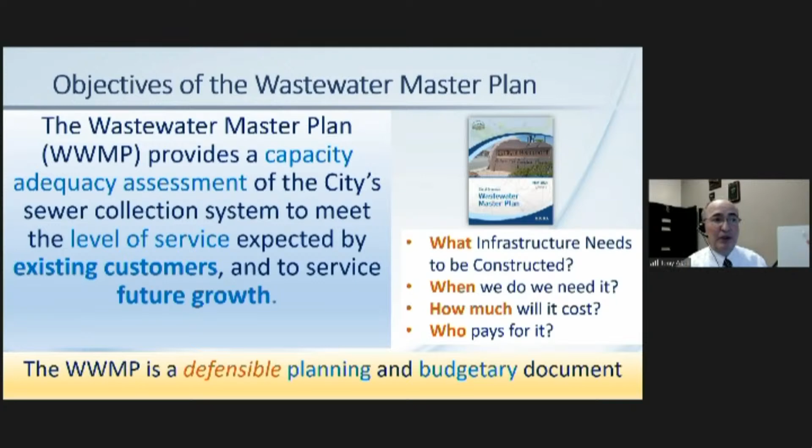So these are the what is it and how do we use it. It does document the improvements that will be needed, line item by line item, how much they cost, and of course who will eventually be paying for them.

It goes down to the street, and in the street we have bigger pipelines that take it down and convey it all the way to the treatment plant. So this is the snapshot that most residents think about. They know they're flushing the water, and it goes someplace. Out of sight, out of mind, someone is taking care of it.

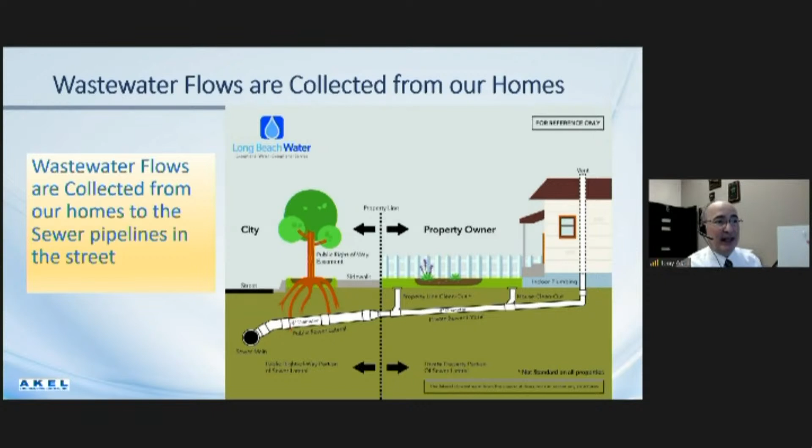Then let's take a look, once it gets in the street, what happens? In the street, we're collecting all that water and it's going to pipelines. This is the ideal condition, we like them to flow downwards, meaning by gravity. That's the best case scenario. So we build pipelines that slope downwards, and if we can do that all the way, we're not using any energy, we're saving. That's why you're going to keep hearing the word gravity sewer, taking that flow and collecting it to the plant. But that's an ideal world.

With challenging topography, we can't have downwards all the time towards the plant. When we have to go uphill, we have to use a device called a pump station. So we collect that water at the pump station, and with energy, we force that pressure. With pressure, we force that water uphill. That's why you hear the word force, we're forcing that water into a main, the main that is up on this side, and that's where you hear force main.

So we talked about three components. There's gravity that collects it downwards. There's a pump station, we have lots of them in Beaumont that collect it. A pump station better be able to pump all that water that comes in, no matter what time of day, pumps it into a pipeline and forces it into that pipeline. It's a main, force main, gravity sewer, force main, pump station. You're going to hear that throughout.

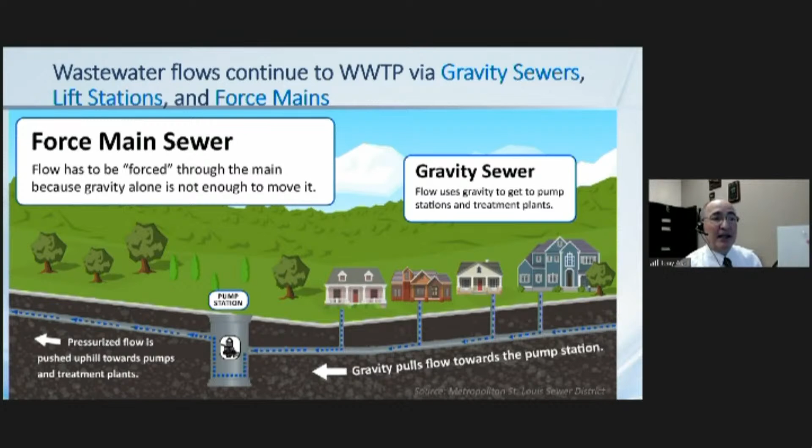Now that we have the elements going to the treatment plant, let's look at our specific system. The map shows the city of Beaumont with color-coded lines. Blue lines are the larger 10-inch pipelines collecting wastewater all the way to the treatment plant, and red arrows show how wastewater is collected from neighborhoods toward a central point, a lift station.

Remember, we talked about the lift or pump station, sending water through force mains uphill, sometimes up and down the topography, to a point where it can go downhill again. But ultimately, we want to send all that water to the treatment plant.

As an example, let's look all the way in the northwest, Fairway Canyon. This blue area goes downhill to what's called Fairway Canyon. It was downhill, but unfortunately that's all we can do here, so we have to pump it with a pump station through a force main. You can see the arrow showing us going this way through a force main, a long way, all the way to Lower Oak Valley.

Lower Oak Valley collects in its own area. The purple area collects that plus the blue area and sends it to the next pump station, which collects the green area, called Upper Oak Valley. All that flow—Upper Oak Valley, Lower Oak Valley, Fairway Canyon—is collected and sent through another force main to the most important pump station you'll hear about today, the Beaumont Mesa pump station. This pump station essentially collects most of the flow west of Highway 10.

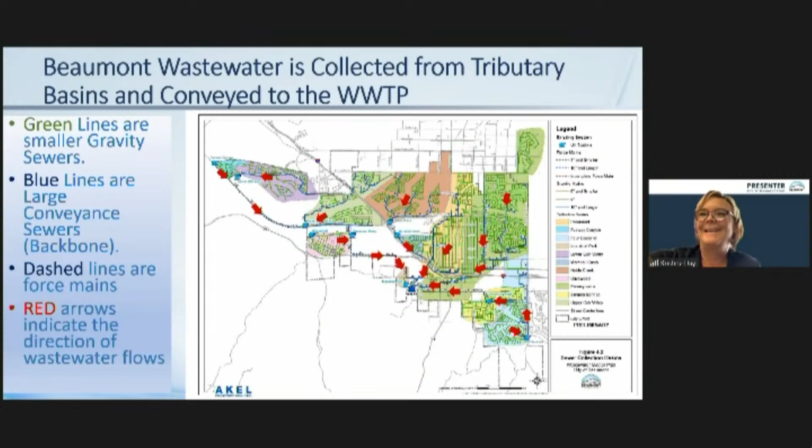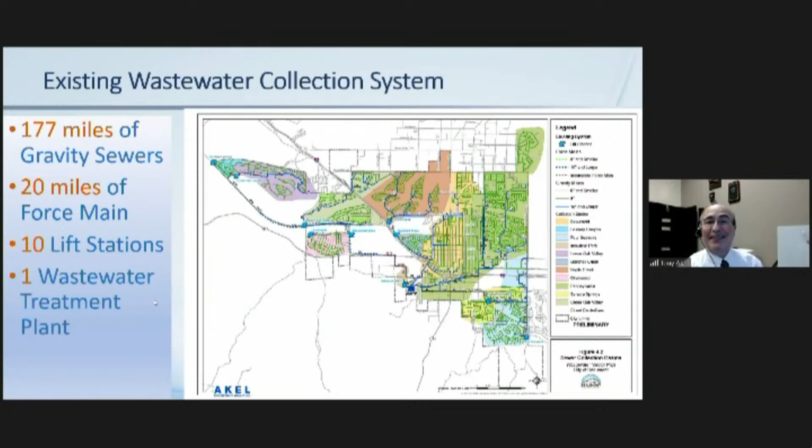All right, very good. So we've talked about the system, some statistics about it. Interesting facts: 177 miles of gravity sewers, the ones that go downhill. We have 20 miles of pipes that are pumped up the hill or up and down the hill, and we have 10 of those lift stations, shown in the blue symbol. And we have one wastewater treatment plant. These are some interesting facts about our system.

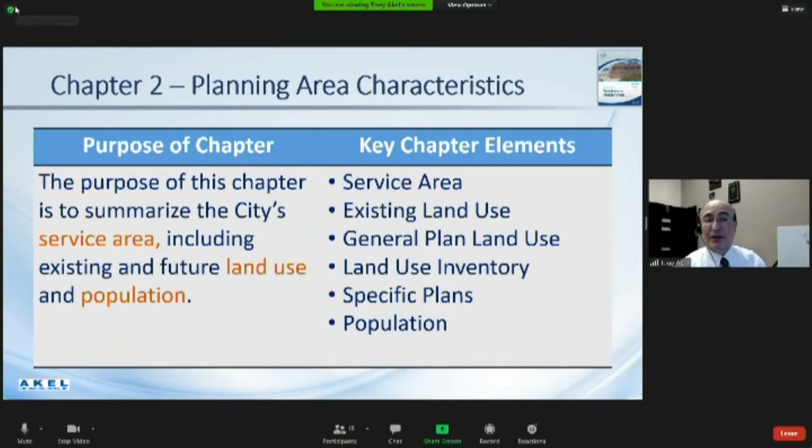Next, chapter 2 characterizes the planning area. Number one, what is the service area that we're servicing? What land uses are we expecting to develop? One of the primary objectives of a wastewater master plan or infrastructure master plan is to support a general plan. The general plan, smart planning people are developing areas and opportunity areas for development. So when a developer comes in, we can tell them what is available, but the infrastructure has to support it. When they are ready, are we ready? Is the system ready to accept them?

That's what this project had to look at: can we accept them, when can we accept them, or if we can't accept their flow at this time, what needs to be constructed so they can develop properly in their timeline? We also looked at some population, and population we look at in generics. The most important part is linking the land to the water, the wastewater to the land.

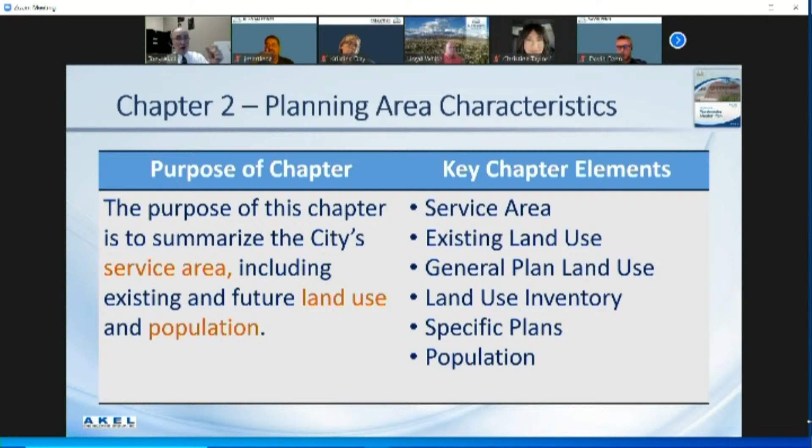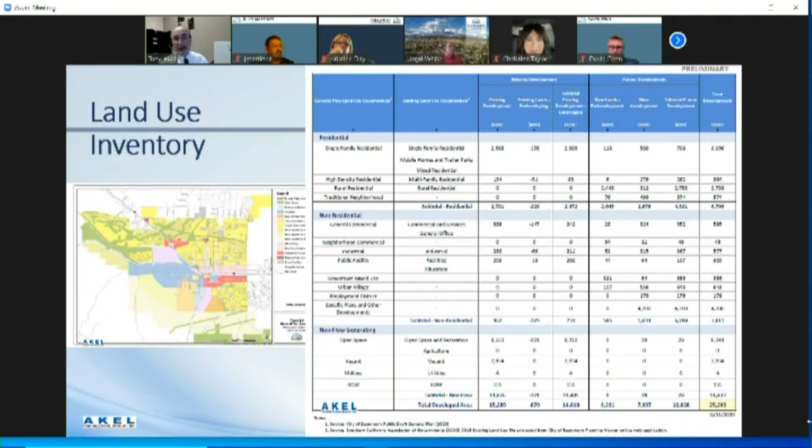Furthermore, we were not working just in generalities and future lands. There are specific lands slated for development that are on the books. So we used those—this is the best case scenario—to inventory what we're expecting in terms of flows from each of those developments. Those are the exact flows that we used.

We documented those flows and used them in the master plan to determine what improvements are needed, what kind of pipelines or pump stations need to be upgraded to accommodate all these improvements. That's quite a bit of improvements slated here. So we identified the improvements needed ultimately, but also short or intermediate term—the 10-year plan is the plan that counts the most.

This is where we know things might happen, we expect things to happen, because things in the future change. We don't know what timeline that's going to be. But 10 years is the standard plan that you look for, plan for, and budget for.

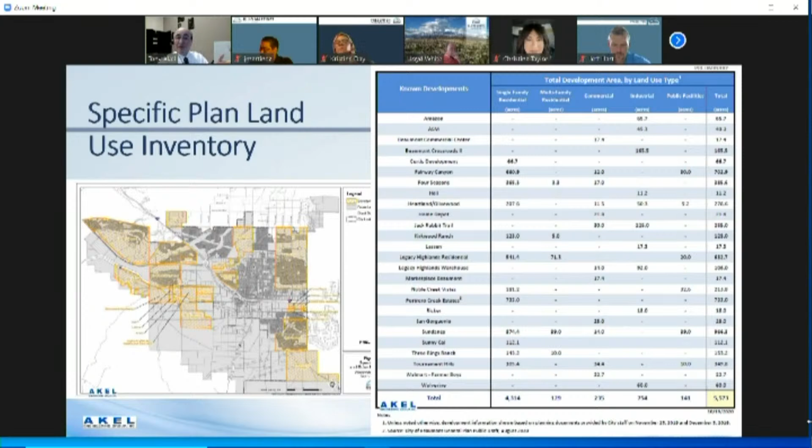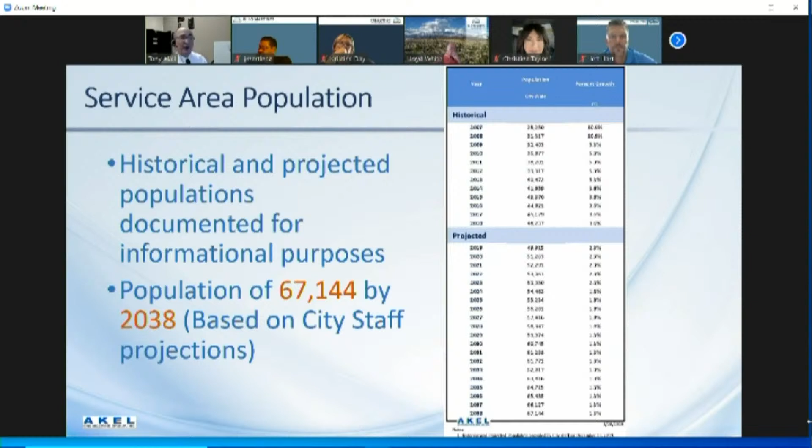We looked at population based on the general plan. We have a population we're expecting of 67,000 people by 2038. So we looked at that and planned for that, although we are also looking at the 10-year plan. So we look at two horizons, essentially.

Then chapter 3 focuses on evaluating an existing system. We have a lot of pipelines and we're judging if that pipeline is good enough. So how do we judge if the pipeline is good enough?

One way to judge it is through what's called a criteria. Those are the elements that tell us how to judge a pipeline—is it good or not good enough? What makes it good? It needs to be this much. So this chapter identifies what the judging criteria is.

This is what makes it also even more defensible. There's a lot of elements that make it defensible, and this is one of them. What criteria—are you very conservative in your judging, or are you liberal in your judging?

Well, in our case, we were consistent with Eastern Municipal Water District, our neighbors to the south and west. They are a big district and have been using this criteria. We have adopted their criteria, and so this master plan follows the Eastern Municipal Water District judging criteria.

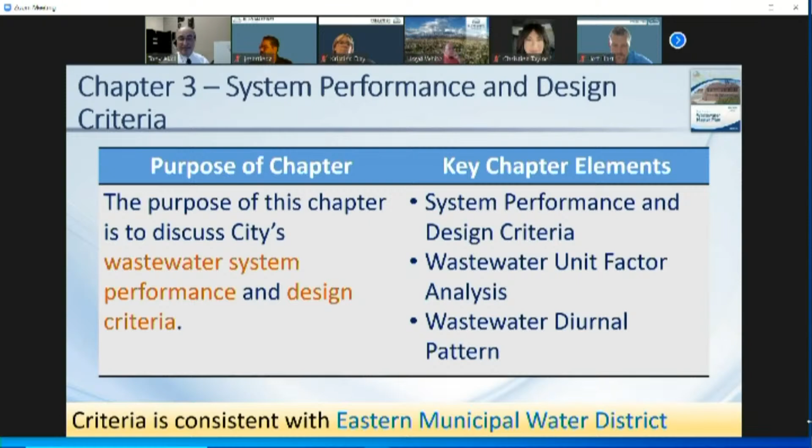The next slide again lists the criteria on the right-hand side, in case you are curious what kind of criteria. For an 8-inch line, we want to make sure it's sloping downward at a certain angle. We want it to go at certain angles so it doesn't get plugged. We don't want that flat—we want it steep enough so it self-cleans itself.

For the 10-inch, we allow it to be a little flatter, 12-inch flatter, but if it's a smaller pipeline we want it steeper so it cleans itself and doesn't cause maintenance problems. This is just an example—I'm not going to go over all of these, just giving an example of a criteria for judging pipeline adequacy, and again, it's consistent with Eastern Municipal Water District.

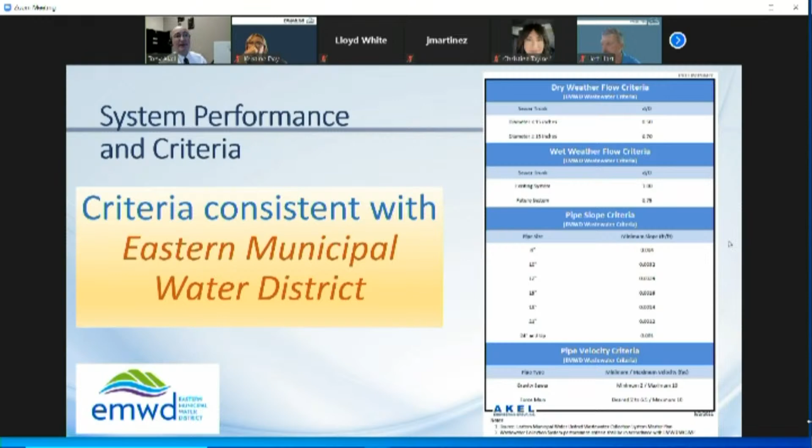Flow factors—again, this is one of the tables you'll see in the document. I won't go into it, but I can tell you what these are. If you have 1 acre of land, how do you estimate flows from that acre? This is the table used to estimate flows. If you have an acre, is it a residential acre or a multifamily acre? The second-to-last column tells us how to calculate flows from that acre—it's gallons per day per acre.

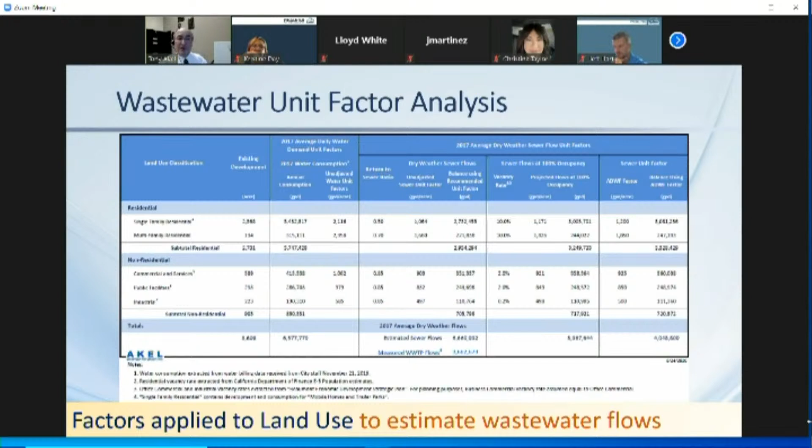If it's single family residential, one acre, we multiply by 1,200 gallons per day per acre—so we get 1,200 gallons per day from that one acre of single family residential. Again, these are consistent with Eastern Municipal Water District—these are the factors for estimating. I won't go into it, but you'll see this in the big, thick document when you get it. You'll flip through this on a PDF format and see this table. That's what it's used for.

Another important concept is the diurnal factor. When wastewater goes into a pipeline, it's not a constant flow. It goes sporadically from houses and businesses, then merges, and flows aren't steady all day. You have peak flows at certain times, like when people take showers in the morning or evening, so more flow comes from residential areas then, while during the day there's not as much. This creates a wave in the system that we have to characterize and simulate in the computer model, because the model measures the heartbeat of the system, not a snapshot in time. It measures the system over a day and over a year, looking at seasonal flows and wet weather flows that might seep into the system.

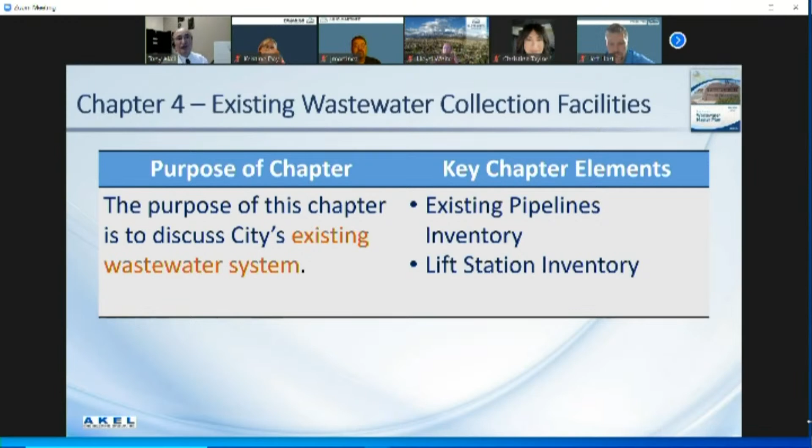Chapter 4 looks at the existing collection facilities, archiving and inventorying them. It lists the inventories of pipelines and lift stations. We've covered this in the introductory section already, so I won't dwell on it. It talks generally about how many miles of pipelines we have, gravity mains, force mains, and pump stations, and this is the table version of that.

We said 177 miles of gravity mains, shown here, and then about 20 miles of force mains. So in total, we have about 196 miles of pipelines. This shows percent-wise what each pipe size constitutes. The majority of the pipeline, 73%, are 8-inch pipelines, the ones that go into neighborhoods. But after the neighborhoods, we collect them with larger pipelines and take them all the way to the treatment plant.

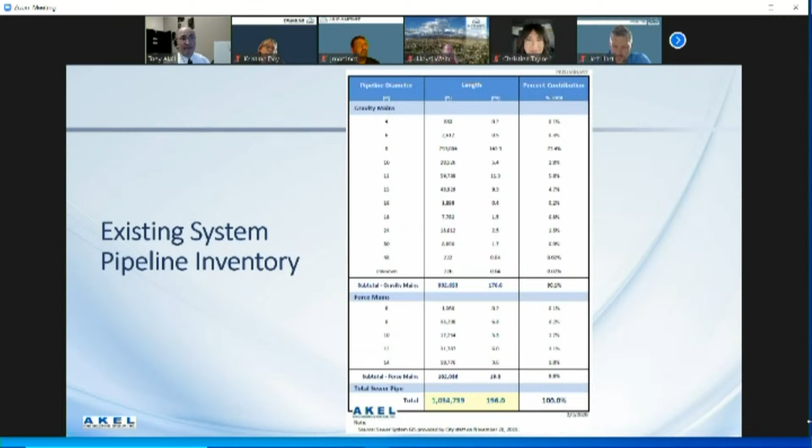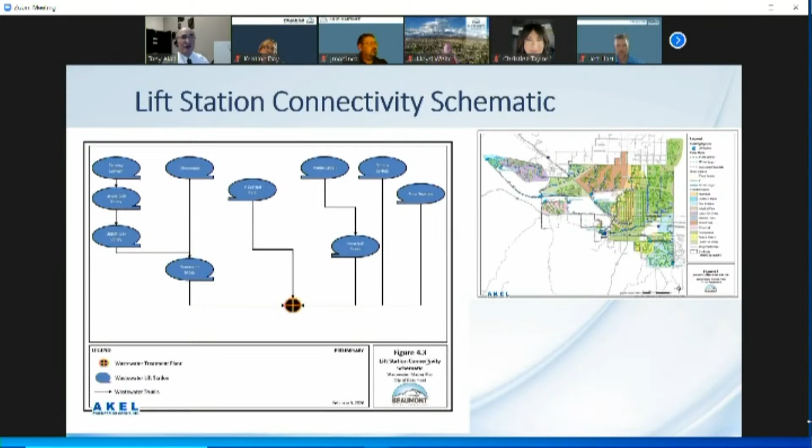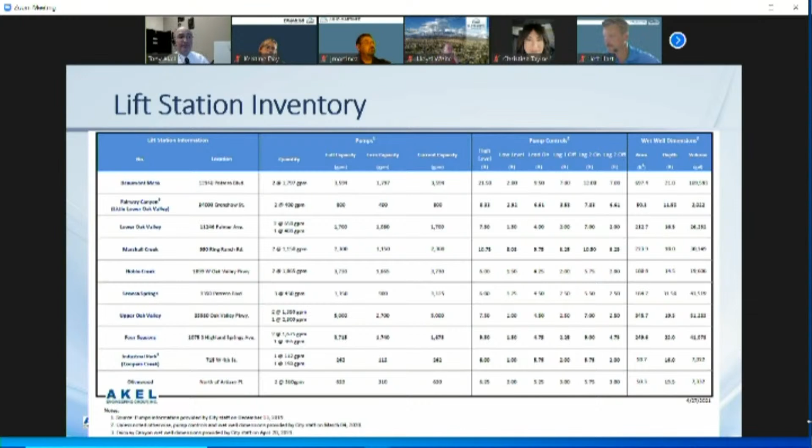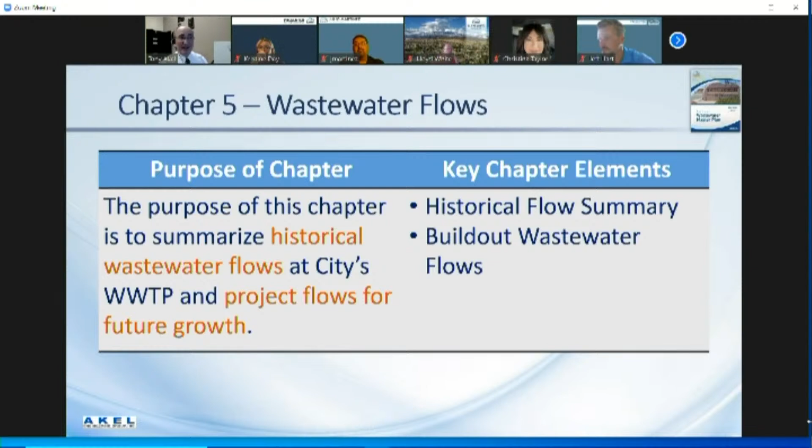We lucked out - we didn't need a big, expensive flow monitoring program. We chased a rain event, and of all times, during the beginning phases of the pandemic, when everyone was panicking and unwilling to go anywhere, our subconsultant VNA was willing to travel and go through approval processes to install the meters, monitor, and remove them. Luckily, with a very short time frame for monitoring, we were able to capture a healthy rainfall event - this was like a jackpot that we got.

Some important statistics. Why are these important? Because we don't judge the capacity adequacy of a pipeline during an average day. We want to make sure that pipeline can accommodate flows at any time, even during peak flows, even during rainfall events. For each of those conditions, there's a separate judging criteria that kicks in.

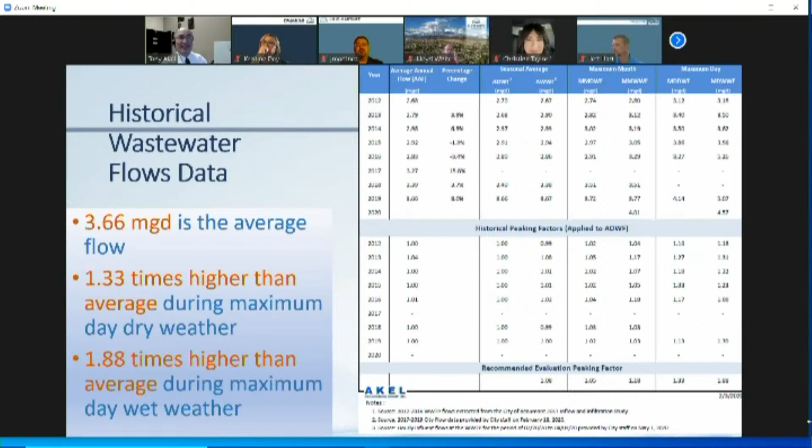You have already seen, I bet you looked at the capacity, at the capital cost, the capital improvement plan. So why is it so much? Because we are developing so much. Quite a bit of flows are expected to come in, and so of course we're going to be expanding our system, and of course it's going to cost us a lot to expand it.

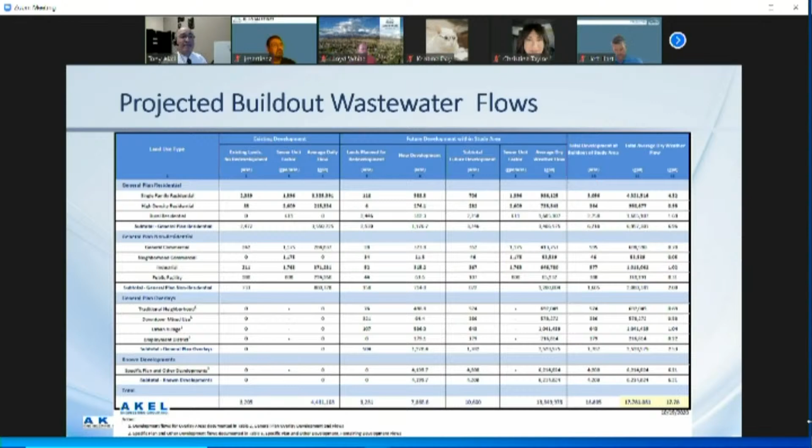After this benchmark model - it's a big investment you made, but as Christine said, you didn't have one before. Now you have a model that is defensible and can be used for a lot of what-if scenarios, including what it was used for here: at ultimate build-out, what do we need? In 10 years, what do we need? Through this process, we also looked at some urgent requests regarding developer needs and constraints. So it has already been used effectively to address several requests.

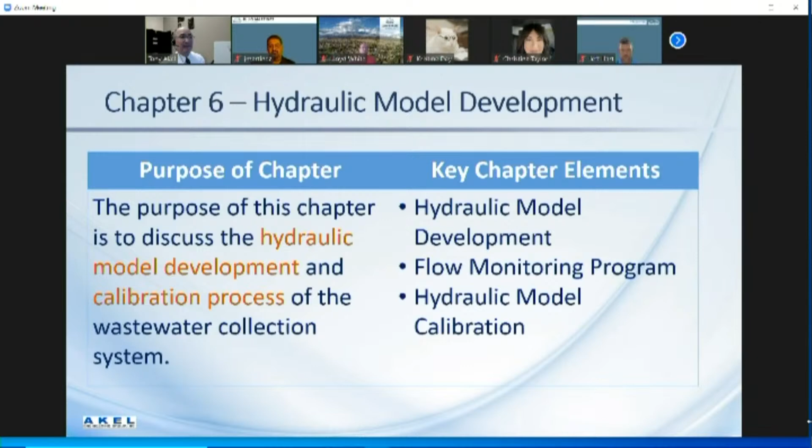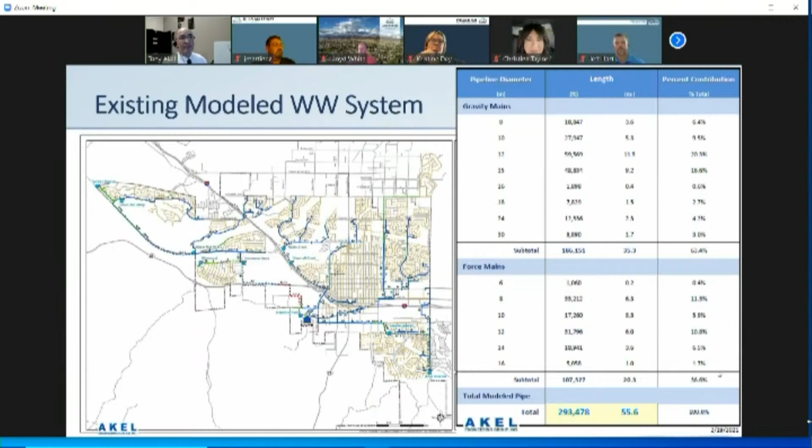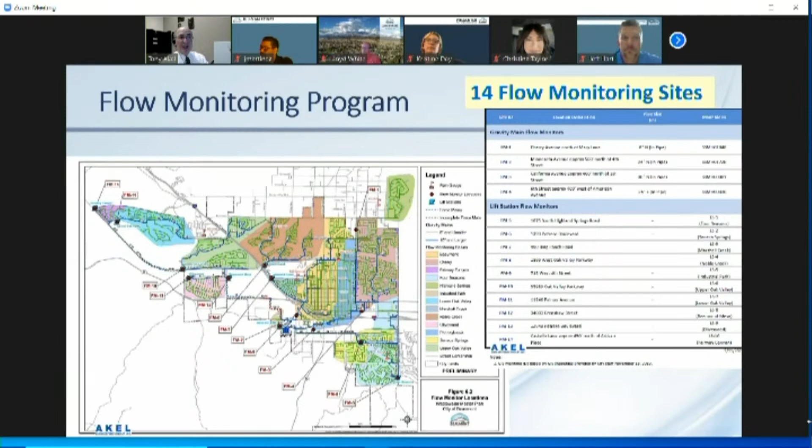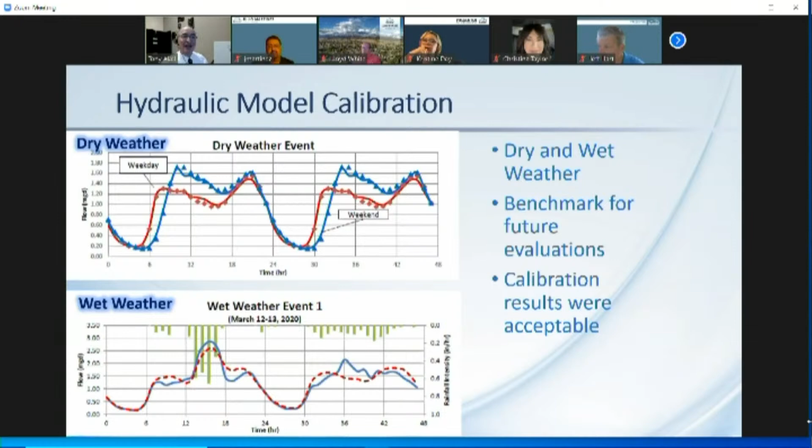The lower graph shows response during an actual wet weather event. The green bars from the top in the lower graph are the rainfalls we encountered. On March 12 and 13, 2020, we were lucky to capture - in March of all days - some very healthy, good rainfall events. It was good for this process.

So now we have this tool. What are we going to do with it? Well, this is the fun part. This is where the fun begins. It was all hard work up to this point.

A lot of data collection, a lot of us bothering your staff. Really, we felt we were bothering them day in, day out. Thaxton, can we get this? Kevin, can you provide this? Jeff, Christine, please help us. We need to get this information almost on a day in, day out basis, getting all that information to make it defensible. Now is the time to use it and enjoy the benefits of this investment.

So this is what we used here, starting from this chapter, is where we looked at the capacity. We judged the capacity with all those criteria we talked about, and then we were able to identify what do we need to fix, where do we start, what do we fix, and how big is the list to fix.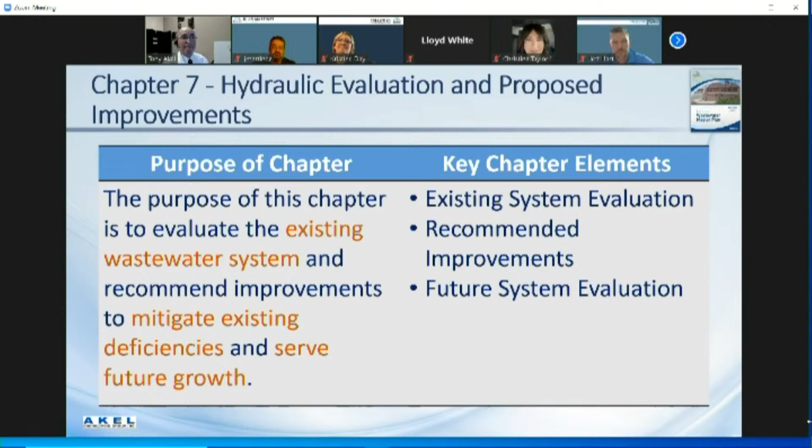So, existing system evaluation. We evaluated the peak dry condition and peak wet weather conditions, as we're supposed to. For peak wet weather conditions, we considered the design storm called a 10-year, 24-hour design storm. That's industry standard. And at the end of the day, the computer analysis is telling us the existing system, from a capacity perspective, pipeline perspective, is in good shape.

Not too many pipelines - if there were improvements needed, we would have shown them in red, flagged in red. So this is telling us the existing system has been planned well for the existing users. And that's the good news.

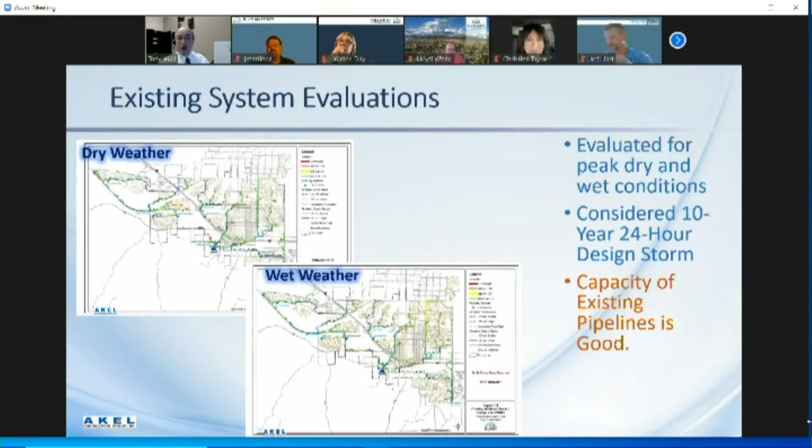The next thing we looked at is identified bottlenecks. One of the more critical improvements that we found needs immediate attention is a regional station we talked about - remember I said the Beaumont Mesa lift station? It carries flows from all the areas west of Highway 10. Well, this is the lift station that is under capacity.

Furthermore, there's a force main that was planned at one point - a dual force main planned downstream from that lift station. They're shown here, one in blue, one in red. They were both designed at one point in time, but only one was constructed. So the second one needs to be constructed. It's shown in red, a 16-inch force main.

Also, the capacity of the lift station is undersized. It needs work. And because growth and developers prefer to develop now, it raises the urgency of addressing this undersized lift station. Also, we identified what needs to be addressed: replacing existing pumps, completing the parallel force main, and expanding the wet well, because it lacks sufficient emergency capacity at this time.

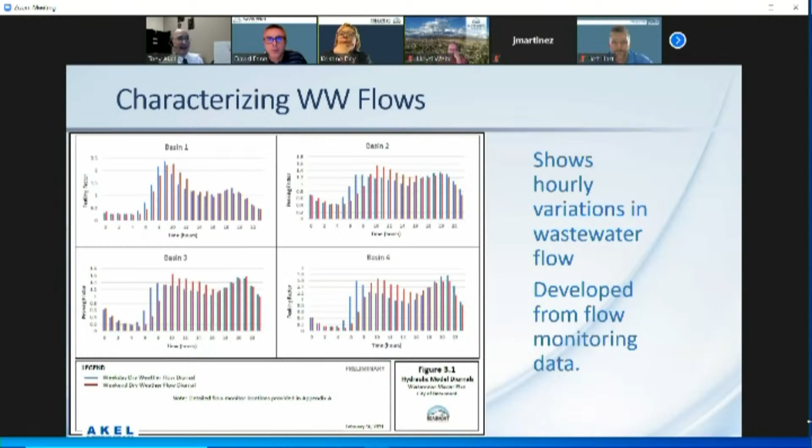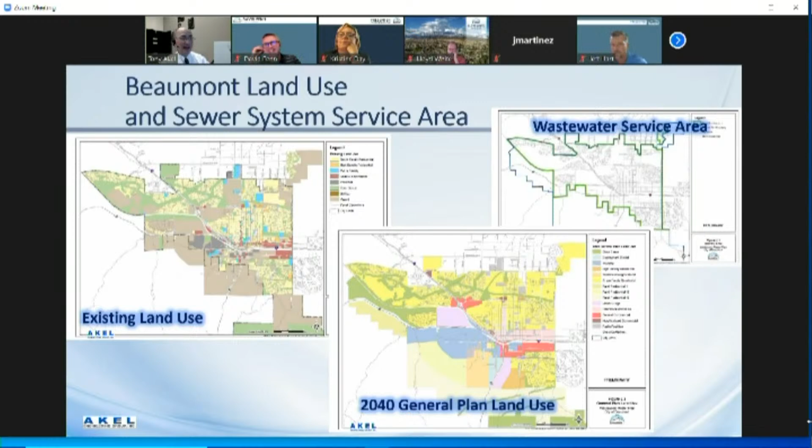Thank you. Should I continue? Should I redo the presentation from here or should I skip? Okay, we'll skip all the way. So we were here with the good news, but also with what we will need. So this was the question. Any other questions on this exhibit?

Tony, I have a quick question. When we looked at the Mesa lift station that's undersized, does that occur because at the time this was done, way back when, they didn't require hydraulic studies? Well, Mayor, I don't think so. I think it was always anticipated that we would need the 12 and 16-inch line. That's what the original plans were. It's not unusual that you wouldn't build to ultimate capacity on a lift station or put in the entire line.

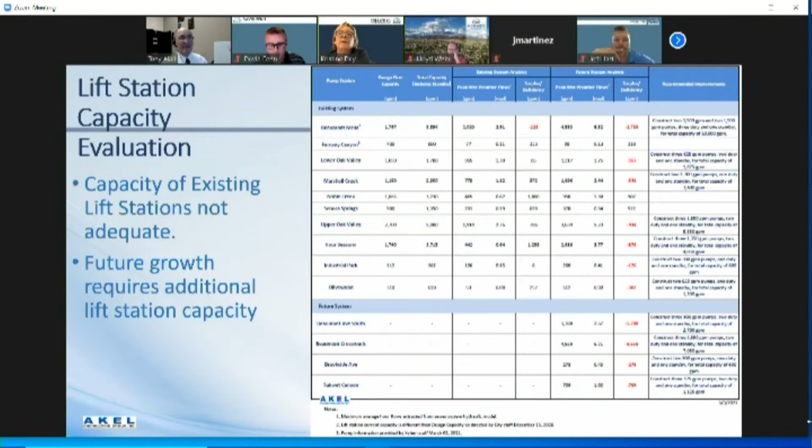The line is under Highway 60, so that was the good news that we were able to find through Tony's work. There are just some small connections on both sides, from the lift station to the area on that side of the freeway, and then from the other side of the freeway back to the plant. I don't think it's that unusual that you wouldn't have constructed an entire pipe, and certainly if you ran into any financial implications at the time, that would be the easiest thing to cut out. That's why we're proposing to pay for it the way we are. It is an expansion, it is eligible for DIF, but I think it was always contemplated that that would be needed. Okay, thank you. Yes, sir.

This was one of the investigative parts we had to work on to put this puzzle together. There was no report that said why or why not. We found documents that showed a second pipeline. Oh, there's a second pipeline! Got all excited, we thought it was in the ground, but there were pieces of it in the ground, and we were able to find out where the limits are. So the good news is that we don't have to cross the Caltrans right of way. It's been constructed, so we could put the piece of the puzzle together, almost predict what they were doing, Mr. Mayor.

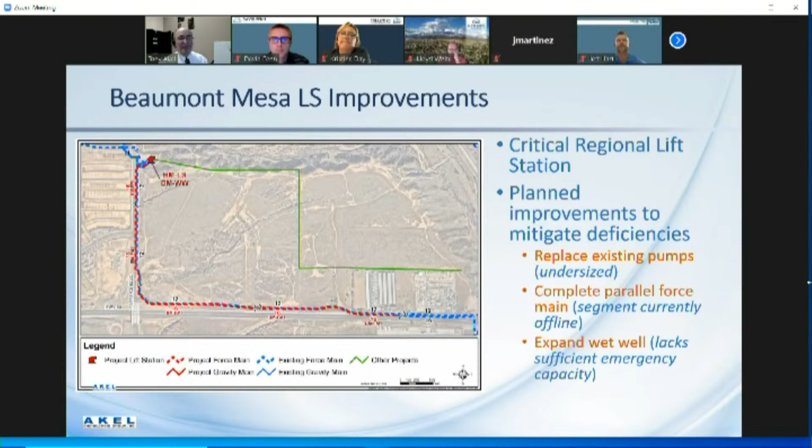At the time, they probably had some constraints, but they were sharp enough to build the parallel and kept it dry - building a parallel was going to become an issue from a permitting and construction timeline perspective. So they helped us, but they saved some money by not building the second main. There's no question they had constraints. They didn't build the second main because it wasn't needed at the time. They figured they could construct it when funds became available. We put that puzzle together, hoping it was written someplace. Maybe it was, but we got this taken care of with great help from your staff, your very smart staff.

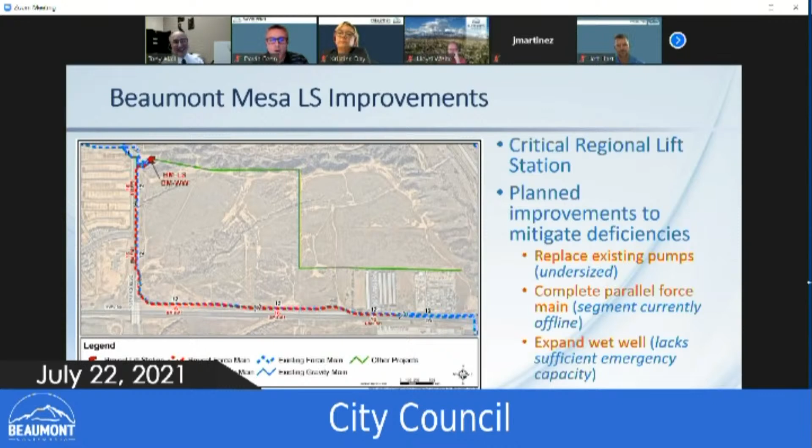All right, so back to that. We paid him a lot of money to tell y'all that over and over again. I was going to say, thanks for being upfront about it. Hey Christine, we knew that. I figured, thank you.

Any other questions on this map? If not, this is summarizing what's needed - this is the results. The rest is going to be, well, how much does it cost for us to build all those pipelines? It's going to be a lot, that's a lot of pipelines. We only need them when the growth happens. When the growth happens, it's going to trigger them, and we can use the model to tell us exactly what segments we need for just this one development. We don't want to build the whole thing. We have one development coming in - what do we need? So the model becomes a live tool that will be used by your staff in the future to address developers' needs when they're ready.

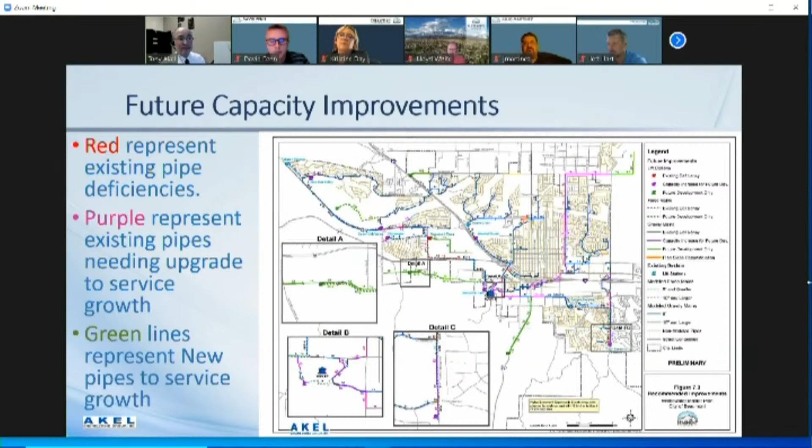So future system evaluations - when you look at the future system, you evaluate for peak dry and peak wet conditions, and validate the recommended improvements.

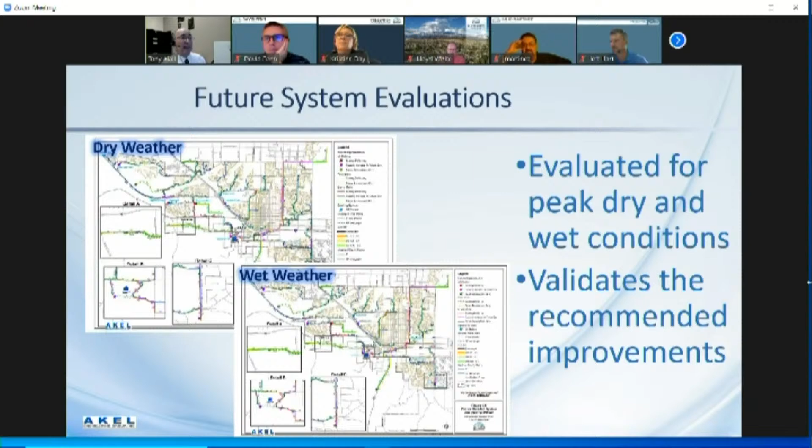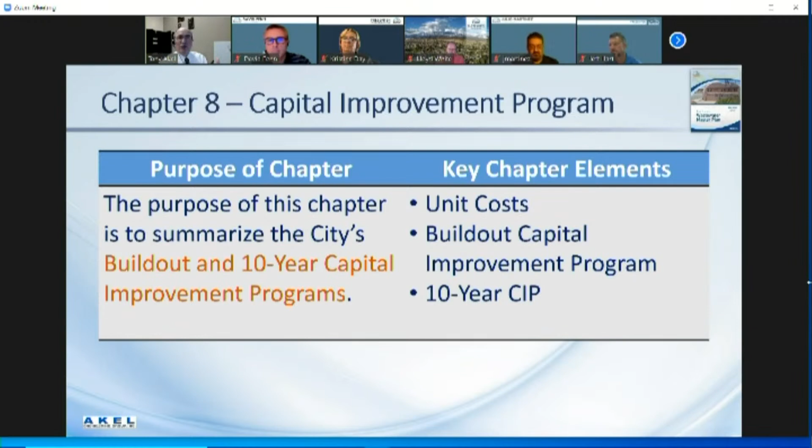Chapter 8 is where we get to costs, and I'm not sure we can mention any dollar amount without someone saying 'oh, that's not too big a deal.' Cost has to be addressed - infrastructure is expensive to build and expensive to maintain. So the program identified the 10-year CIP. This is a reasonable planning horizon to look forward to and plan for. Beyond that, we want to know how much, but we don't want to worry about this big number - we want to worry about what we need for the next 10 years. Our crystal ball can see a little bit within that; it's hazy, but within 10 years we can see a little better, and within 5 years we see clearer.

Document cost assumptions - how did we develop costs in case someone is asking or challenging where the numbers came from? We made it very transparent - these are our cost assumptions, these are what we used. Further, we applied some contingency to the cost because things might change during construction. For those contingencies, we used the same contingencies that Eastern Municipal used.

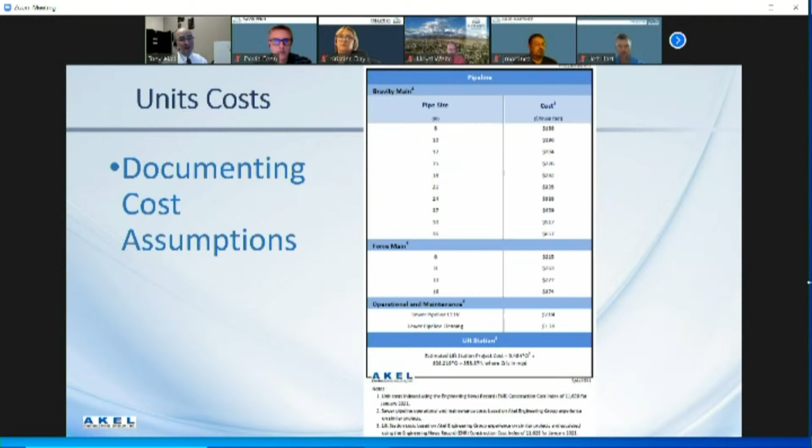And the capital improvement program - you've seen those, but now the difference is, when you get them, you'll be able to zoom in on a PDF and see some numbers. Why did we add all those numbers, why did we clutter this? Because every number here refers to a single pipe, and that number goes to a table. The table has more detail about how long that improvement is, what size it is, whether it needs any special construction, and what the costs are for that one improvement, one pipeline at a time.

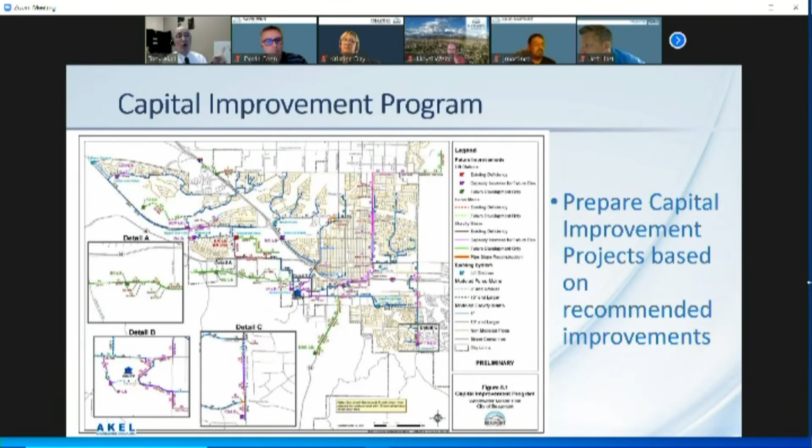It goes on and on with a long list, but summary-wise, what are we looking for in terms of costs? This is a summary. If we're looking at the gravity pipeline improvements, about 0.3 million. Beaumont Mesa lift station improvement is going to be costly because there's more involved - there's a longer force main, the lift station carries a lot of flows from the area to the west, plus we need a wet well increase, and that's short of $10 million for Beaumont Mesa lift station.

There are lift station condition assessment improvements - condition means more than capacity for the lift station. There are other things we need, whether it's electrical, components, pumps, motors - things are falling apart and we need to maintain those. Those are continuous and everywhere, so the costs within the next 10 years are estimated at 3.6 million for that. O&M, operation and maintenance improvements, estimated at 5.1 million. And the treatment plant - at the end of the day we want to make sure where that flow goes is taken care of, and that's just as important. So the total for the next 10 years is approximately $20 million, or 20.6 to be precise.

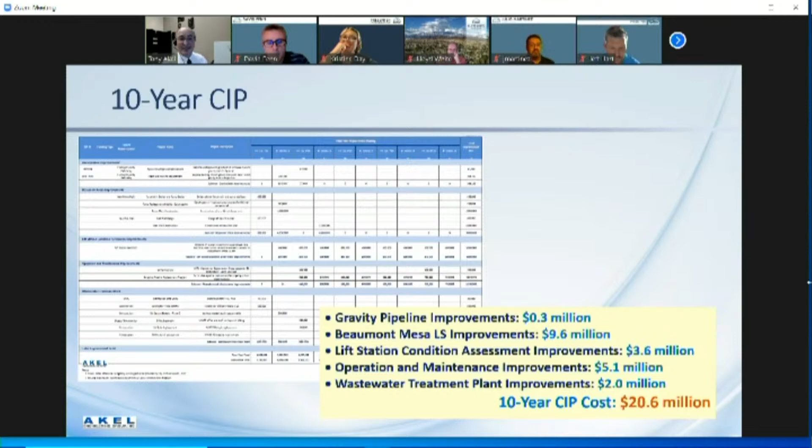Any questions on this? Okay, hearing none, moving on to the build out.

Build out covers a lot of flows and a long time into the future. The numbers are higher because the infrastructure we're building is much bigger to handle a lot more people. Pipeline improvements, 32 million. Force main, 21 million. Lift station improvements, 34 million. And the other wastewater system improvements are estimated at 10.7, for a total of about $98 million.

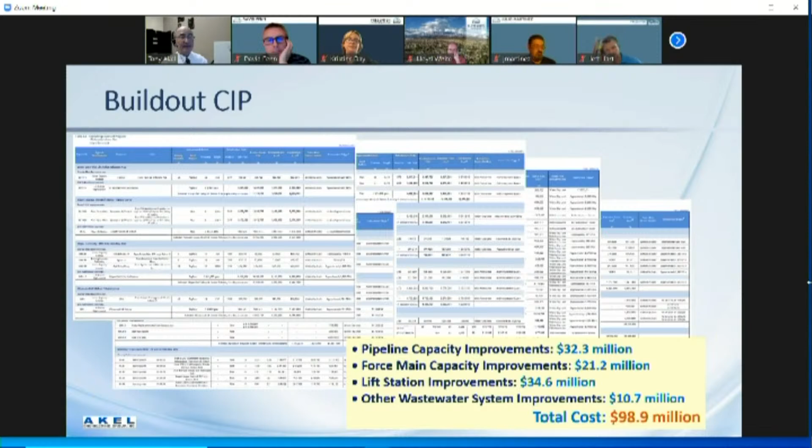And so in summary, we've gone through this. You made it, congratulations. But in summary, what did we look at? What was this all about?

It was a hard look at the capacity adequacy of the existing system. So we were determining that for existing customers, the capacity of the existing sewer system is good. The capacity of most existing lift stations is not adequate. So not good all around. The lift stations are an important element as well.

Extending service to future growth, the future capacity pipeline projects are developer driven. So when they are needed, we'll identify them, identify the costs associated with them, and then there will be a specific plan and trigger to develop it. When we need it, we'll construct it.

So what you'll expect next is a deliverable — that's a master plan document. It's going to be a big PDF that has all of these exhibits and tables that you saw here, and more, plus a lot of text that describes the process, the methodology, how the capacities were judged, and what we did through the process.

There's a lot that we did that I can't talk about in half an hour — it's been an hour. I felt like I only talked for 10 minutes, but it's been an hour already.

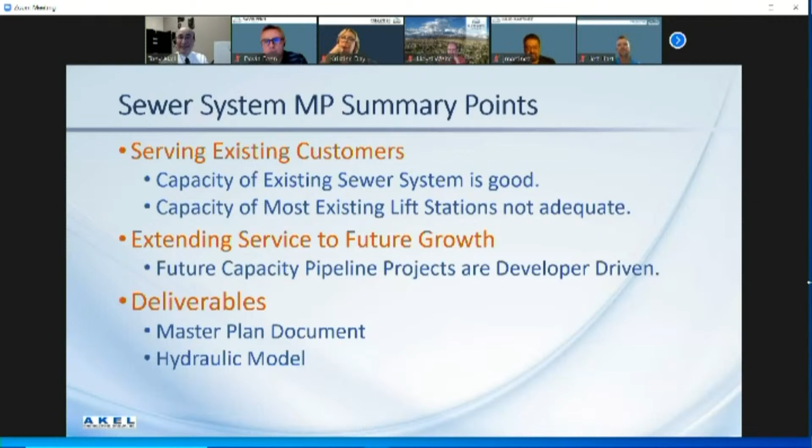Next step is a rate study. Are our customers paying adequately for the existing system, or are we under-collecting or over-collecting? That's what it's about — we want to collect the right amount, not over-collect, not under-collect, but we also don't want to be holding the bag at the end of the day. We want to make sure there's a balance.

But also pipeline condition assessment — remember we talked about capacity, and I'll mention condition a little in the next slides. That's becoming very important in our state because regulations are coming. They're at the federal level, but also at the state level, and the state is very serious about this. It's a matter of time, so we may as well start preparing. Also, a more extensive condition assessment, so we make sure the conditions of the pipeline and the lift stations are covered, and the master plan needs to be updated every 5 years.

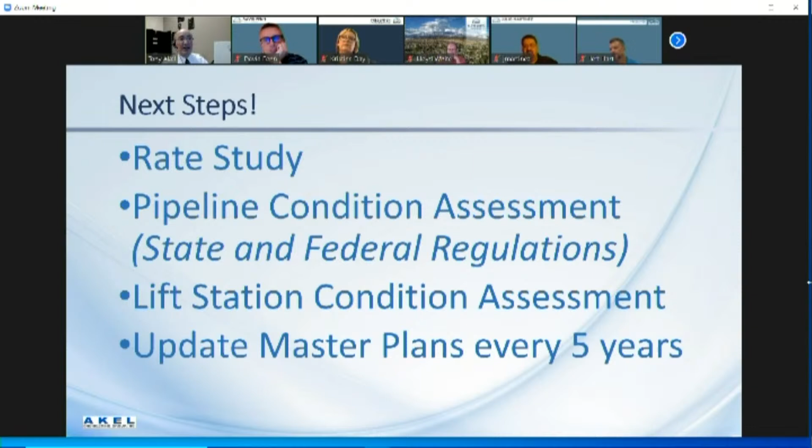Talking about conditions real quick — as you know, underground, you see the pipeline in the exhibit on the right-hand side. Over time, pipelines age and develop cracks. With those cracks, roots go through, find the water, and make the cracks bigger. So when there's rainfall, more water goes into the sewer system, and that's not good, because water from wet weather takes up capacity reserved for customers. As a consequence, the pipelines become deficient, and the pipeline starts to fall apart. What does an aged pipeline look like? Let's take a look.

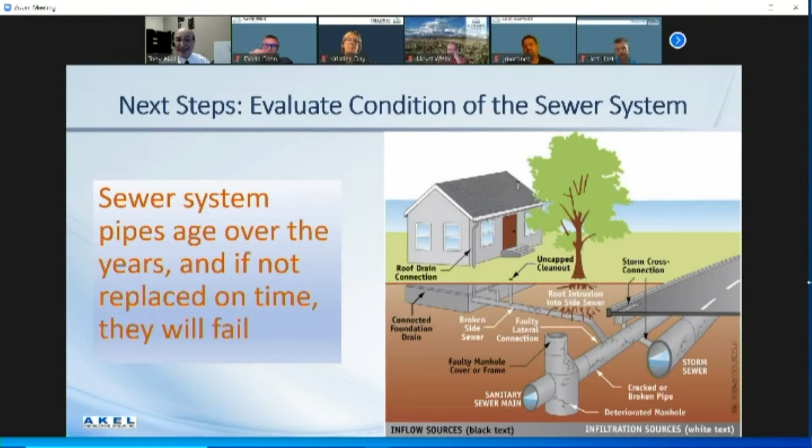There's something called CCTV, a camera that you push through the pipeline to monitor and look for cracks. If you see cracks in the pipeline, as an example, the camera stops and pans to the right or left, takes a picture of that, and marks it up.

That's how we know where the pipeline is falling apart and needs maintenance. It's underground, so no one cares about it until it fails. And it does fail sometimes, you hear about those happening, like a major road collapsing because a sewer underneath it collapsed. We don't want this to happen. We want to catch it before it collapses, because it's a lot more expensive to fix after it collapses than to catch it before.

So the next step is a CCTV program that goes and evaluates where those lines are defective. As an example, the photo on the right-hand side shows a concrete pipe. Inside the concrete there's steel holding it together, but what you see on the right is the steel bars are visible, meaning the concrete has fallen off.

Therefore this is losing its structural integrity, and this pipeline might become a critical pipeline. It might fail, we don't know when. It might fail in 10 years, or it might fail next year.

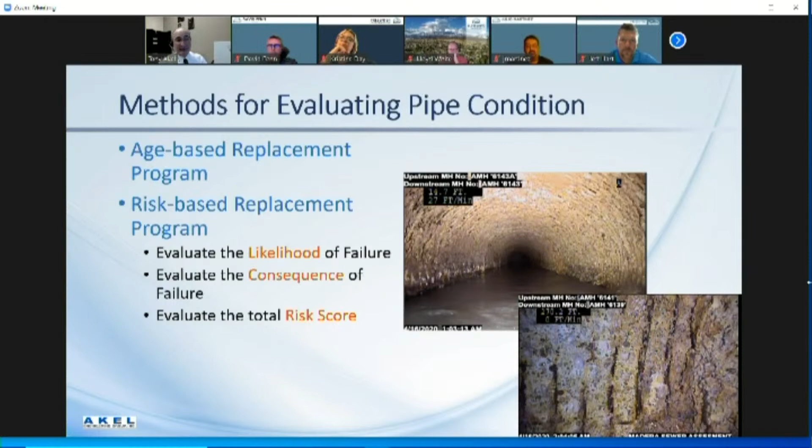Any other questions?

I've got another one, if that's okay. It's in reference to our lift stations, particularly the Beaumont Mesa one you mentioned as being undersized. Just in general on the design and how they work, is it redundant? Is there a backup pump? What if it goes out because it's being overused? I'm sure there's a contingency plan, but I don't know what that is.

I can address one part of that, and this is a great question. Is there redundancy? Oh, we made sure there's redundancy, and that's why you're seeing almost all of the lift stations flagging out as deficient if we take that redundancy away. One of the criteria we used here, one of the judging elements, is if one of the lift stations goes out of service, do we have a plan B, another pump station ready to go on standby? I'm here, you don't use me, but when the other pump station goes down, I'm going to be stepping in. Do we have that ability?

This master plan looked into it. So when you see a deficiency in a pump station, it's because we wanted to make sure we build that redundancy for an emergency condition, because they do happen.

Councilmember Fenn, so a couple of items you've seen us bring forward recently are redundancy items, redundancy pumps. We're also working on the PLC project, which will help us cycle pumps in order to basically use them all, instead of using one until it goes out and the other doesn't start. So we've got a couple of those things. And then the other deficiency component that Tony mentioned is adding pumps. We've worked that into your CIP, so if you go back to the CIP you approved in June, we start adding 400,000 over 2 years per year to start addressing some of the deficiencies at these lift stations.

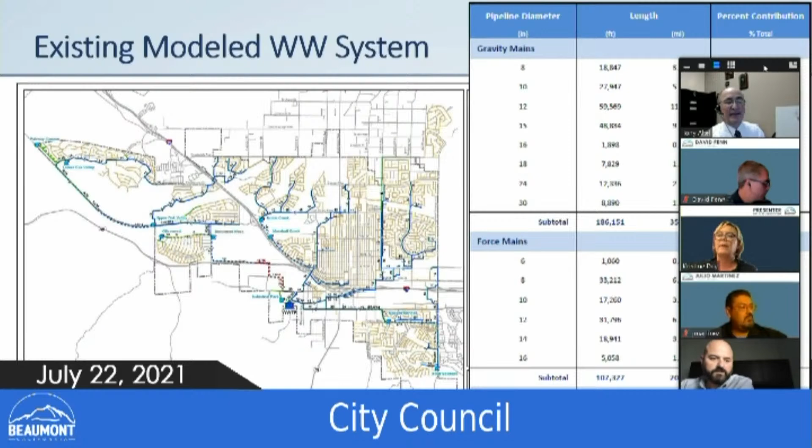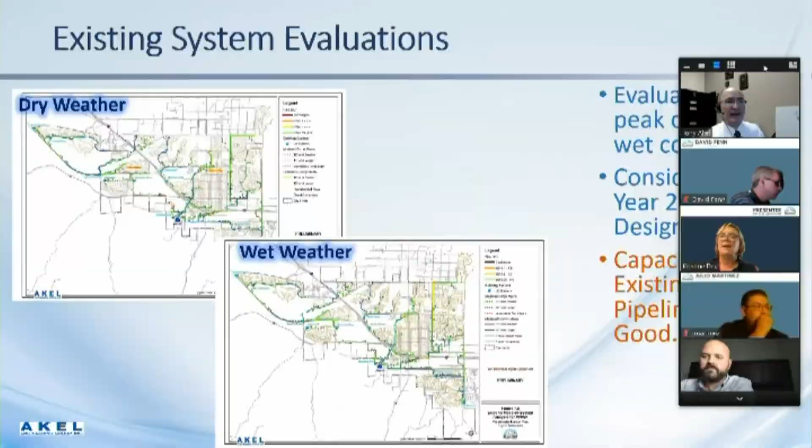So again, we deal with multiple things in Beaumont. We deal with the PSPSs, we deal with rolling blackouts, we deal with typical maintenance. And if the ATS switch doesn't kick the generator on, that's just real life, those things happen. Your best well-laid plan, Thaxton and staff could go out on a Thursday, cycle the generator, which they do. They exercise all the generators at each of the lift stations. And come Friday, we have an event and the ATS switch doesn't kick over, or the generator doesn't come on.

So one of the projects we put into the CIP, specific to making sure we didn't have a system failure that resulted in fines, was to upgrade the capacity of that wet well and take it to, I believe, an hour response time. And while that still doesn't seem like a lot, it's at least enough to get the call from SCADA to respond for the on-call person. We don't have 24-hour staffing at the plant, so the on-call person gets the phone call, then responds, picking up the truck, potentially picking up the Vactor truck, and getting out. We felt like while it is a very large price tag, about $3 million, it was well worth the ability to eliminate fines.

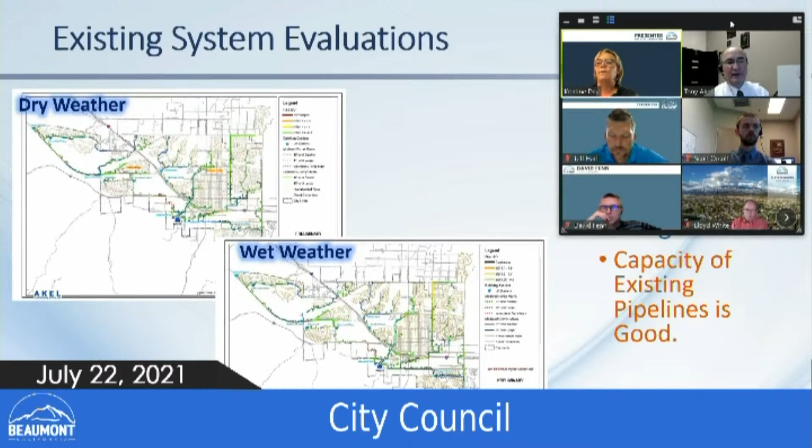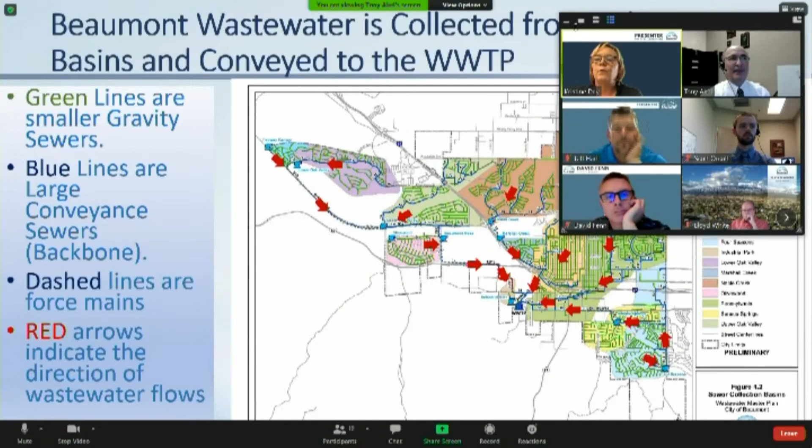That particular lift station, Tony, I think it's back a little bit -- it was the one with all the red arrows. Oh, way back, the one that has the arrows, all the way at the beginning. Yeah, so Beaumont Mesa, sorry, I'm combining my words, it has 1, 2, 3, 4 lift stations feeding into it.

Staff does a lot of negotiating with this particular lift station. Should you have an outage, we can stop flow, we can back up in pipelines, but all of that needs to be done. In addition, we felt like because of the location next to a tributary, the fine significance could be much larger -- it could be upwards of $1,000 a gallon if you had repeated overflows. You could do the math on that; you don't have to overflow much before you reach 3 million to get to that.

So one of the projects staff will put forward is looking at any of the lift stations. We're going to start with Beaumont Mesa, and you approved that. But any of these lift stations that actually have flow through another lift station, I think it's important to begin looking at that same scenario. So Noble Creek flows through Marshall before it comes to the plant. That definitely puts Marshall as a regional lift station accepting flow from the huge basin where Solera is, as well as the basin where Three Rings Ranch is. Those are all important components when you start to look at the wet well size.

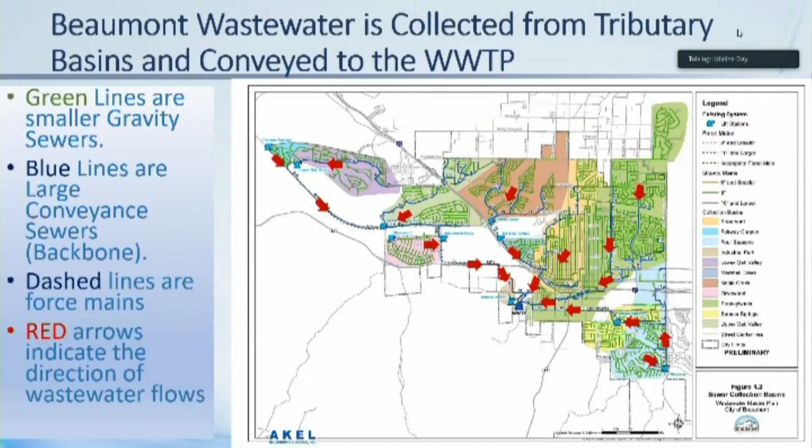In addition, Thaxton has applied, and I believe the city manager has conveyed to the council, that we are trying to get some of the money given out for backup battery systems at our lift stations. We have 3 of those in the pipeline; we have not been awarded any of that. We also have it for the plant. It would just be another way to make sure we don't go offline.

The other concern staff has had is with the PSPS events -- if they go off for multiple days, are we able to get the diesel fuel that's needed? It's great that you have a generator, but you still have to fuel it.

And if we're looking for fuel, probably everyone else is as well. And so we take all of those components in, but we will continue to bring to the city council anything that we see as risks in your system that we want you to pay attention to. Certainly these are, at the end of the day, all council decisions, but we'll give you the monetary assessment of a fine versus the potential of an improvement. So I just wanted to tell council we've looked at that as well.

So Christine, I have a question on that note. So basically then the pipeline condition assessment and all of those condition assessments are a part of the whole wastewater master plan, correct? It's all one. Yes. What's the timeline on those reports coming out, those assessments?

So those will be done yearly. So the legislation that we understand is coming down the pipeline basically says that we have to hit a certain target of our conditions, so we have to CCTV a certain portion, we have to clean a certain portion, and then we have to repair a certain portion. And so what we put into the CIP are numbers associated with that, and into your financial projections. We have tossed this information over to Jennifer Ustation and the finance team to make sure that we're accounting for this.

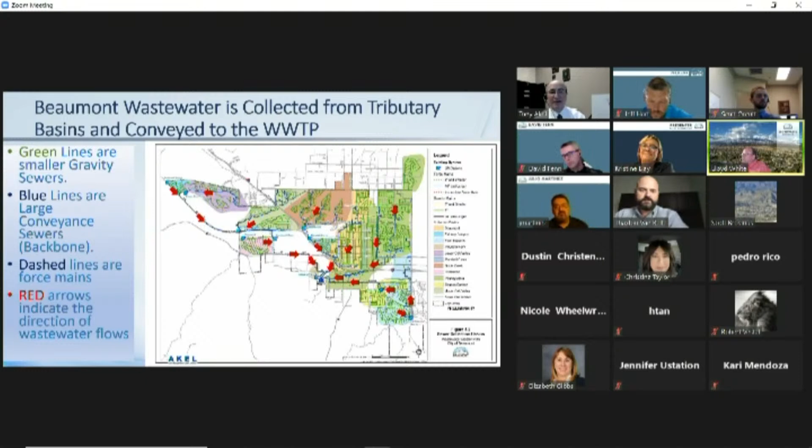Okay, and I assume today we're going to get to some numbers, dollars, and ideas, as I think the final chapter was supposed to be who's going to pay for it. I understand what you said about some industrial uses or projected uses having more demand on the system versus others. I don't know if it's in this report, but is there some kind of standard chart that shows logistics puts this much demand and food puts this much, and if not, I think it would be helpful for me anyway to move forward. But those were the only questions I have at this point.

We definitely have that level of detail, Councilmember White, and can certainly get it out to the council. It will be part of the overall wastewater master plan that you'll get a draft copy of prior to adoption, weeks in advance, because we want you to have plenty of time to go through it. That level of detail is definitely in there. As Tony said, we are using EMWD standards that also relate back to land classification. So if the land has a certain classification through the general plan, we've carried that forward for planning purposes for each land use. But we can definitely get you what those demand flows are. I've seen the chart that Tony's put together on that.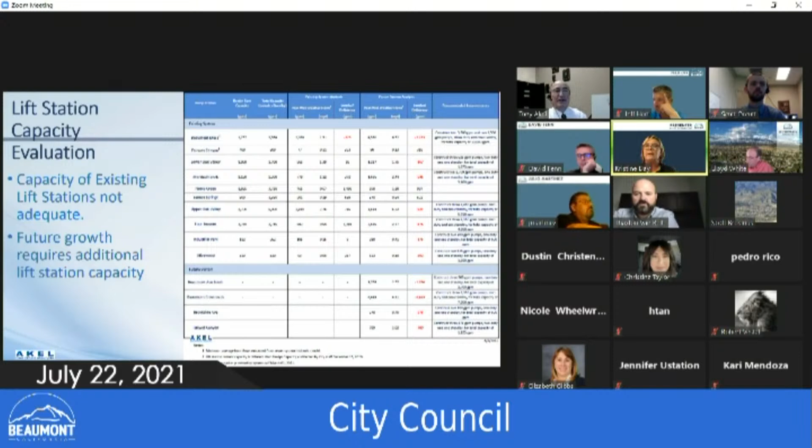Councilmember Santos, in the 10-year CIP we anticipated all of these lift stations. Some, like the one at Amazon and Wolverine, essentially go away in lieu of another bigger lift station. We've anticipated in the 10-year CIP that while that lift station will be new today, by the time we get out 10 years, I included that into the CIP anticipating it would probably need some condition assessment.

So you'll likely see that as a rolling number moving forward if you're on council in 10 years, which we fully expect you to be -- that number keeps going, because by the time we get through your lift stations, it's time to cycle them again.

Tony, can you move to the one after this 20 million, 20.6? I'm just seeing, on the 20.6 million -- correct, the one on the screen. Right after that, can you show it? There's a 98 million after that. Put it on the screen before -- the forecast, next slide. 98. Next slide.

This is the total cost. The 20 million -- yeah, there you go -- the 98 million. Councilmember Santos, the 20 million would be what we anticipate going into the city CIP that existing ratepayers would be responsible for.

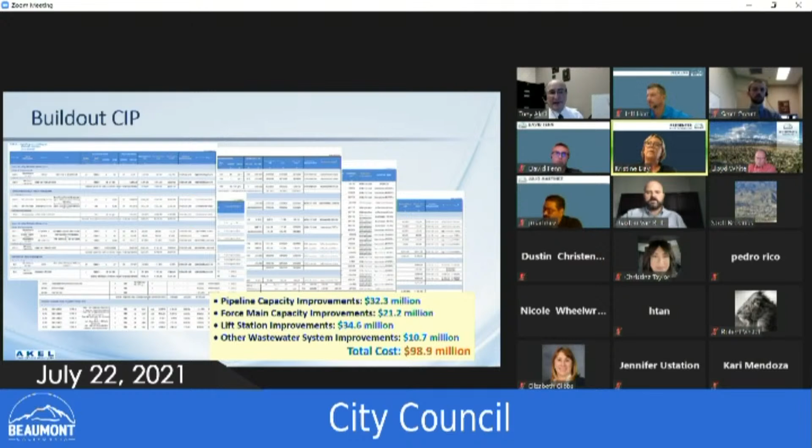Tony, if you can go to the $20 million slide. So once a lift station is built and dedicated to the city, Councilmember Santos, then we would obviously take that in. We would be responsible for managing it. It may be that at the end of 10 years, we have to go to 600,000 because we can't get to 12 lift stations in 10 years. That's correct. Okay, good. Thank you.

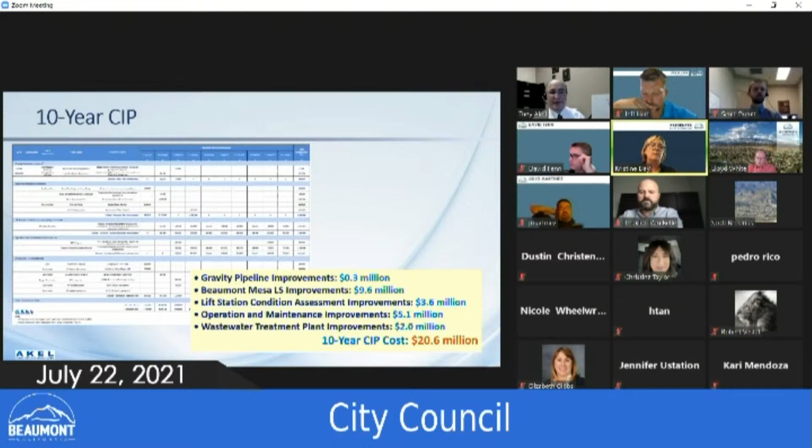I've got a couple of questions. Also, going back and looking at the chart where we did the wastewater unit factor analysis, what does GPD stand for? Gallons per day. So when we look at, if I understand what I was looking at correctly, we're taking 1,200 gallons a day for residential use per acre, correct?

Correct. So as the state continues to push housing and they continue to push densities and higher densities, will we be able to anticipate that affecting that number, or will it have any effect on it at all?

This is one of the reasons why Christine mentioned, typically you review the master plan every 5 years, because a lot of things can change. One of them is the state imposing densities, and a lot of it is coming down the pipeline now. But a lot of things, land use conditions can change. In this case, let's talk about the densities that the state is talking about. These numbers can change. What is involved here?

These numbers did not include the response during the pandemic. Guess what happened during the pandemic? People stayed at home. And those people that stayed at home more often were flushing more often, were taking more showers, exercising at home, not going to the club, but at home. So more water was being used, about up to 20% more.

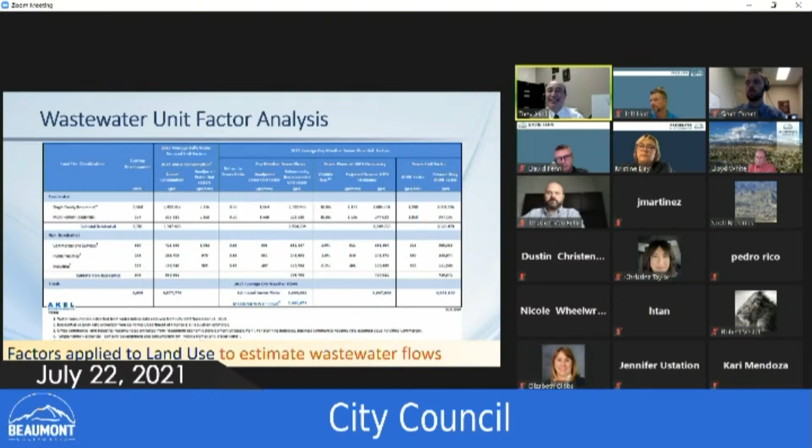So this team looked at a lot of perspectives, a lot of variables, just to make sure we have considered them and can address them if they do come up. Thank you for explaining that.

You explained the high month in November, but you didn't explain how we got a high month in August, basically the middle of summer. Typically, if we don't look at wet weather flows, the highest flows we expect are during the summertime, and people may be more active, using more water indoors. But we do see the typical dry weather flows - there's no rainfall, and the peak dry weather flows are typically in July or August. In this case, I'm not sure why July is low, but August seems to have the higher dry weather flows.

And then the rest - November and December - you can tell these are based on response to wet weather. But summertime, maybe you have a visiting population as well, so there's more dry weather flows that makes it to the plant.

I'll point out, if you look at January, you'll see significant rainfall, but you don't see the corresponding inflow and infiltration. Some of the inflow and infiltration we found is due to construction, and that's not unusual - a developer comes in and puts in pipes, and clean-outs get cracked, or a manhole cover shifts. We were able to take this data, based on the basins, and that's what we chase back - Thaxton and his crew work on that all the time. We've also incorporated the building inspectors into this process to make sure we don't have construction inflow coming in. So one month you may see significant rainfall but not see it at the plant - there are lots of variables that can happen within the system.